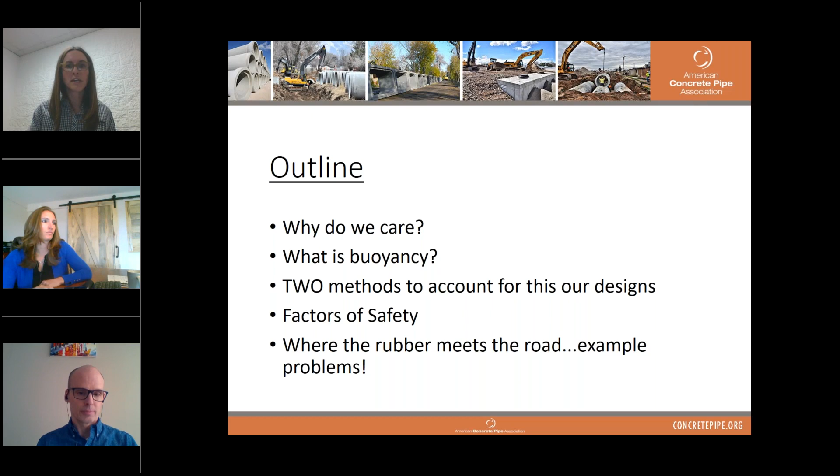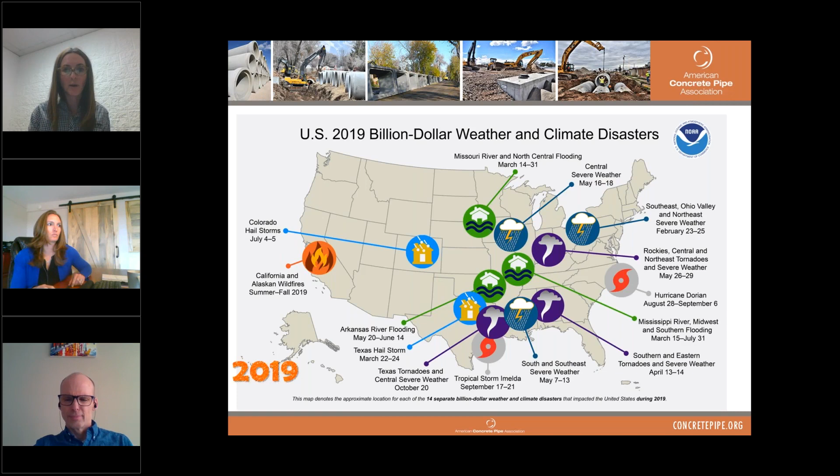This is a figure from NOAA showing 2019 billion-dollar weather and climate disasters. Pipe flotation is becoming a more common occurrence these days. If you look at the extreme events we've seen in recent years, many of them involve flooding and extreme water levels that are beyond what we typically design for.

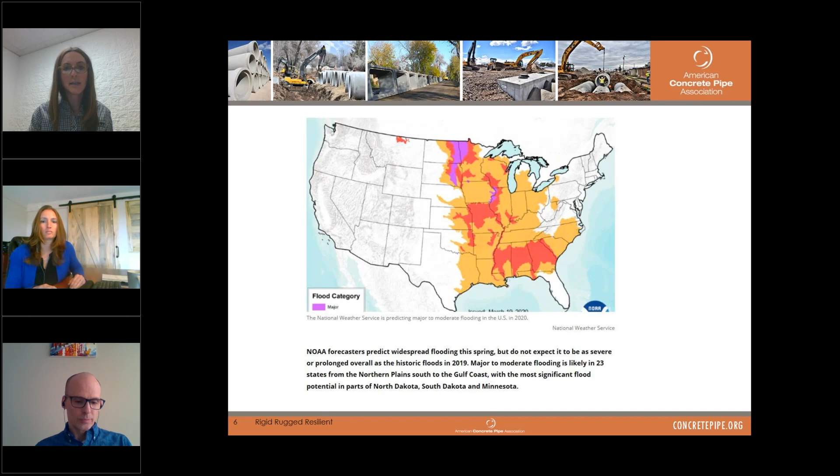This is another graphic from NOAA, and they're predicting widespread flooding this spring. Not as severe or prolonged as 2019, but major to moderate flooding in 23 states from the Northern Plains to the Gulf Coast, with most significant flood potential in parts of North Dakota, South Dakota, and Minnesota. So pipe flotation is something we should be looking at as we go through our pipeline designs and culvert designs.

So let's talk a little bit about buoyancy, get some of those concepts down. So what is buoyancy? There's an upward or buoyant force on any object in any fluid. If the buoyant force is greater than the object's weight, it will rise to the surface. If the buoyant force equals the object's weight, it will remain suspended. If the object's weight is greater than the buoyant force, it'll sink, right?

The buoyant force is always present. It's kind of like the tagline from a Star Wars movie, right? The force is always with you. So whether the object floats, sinks, or is suspended in a fluid, buoyancy force is there.

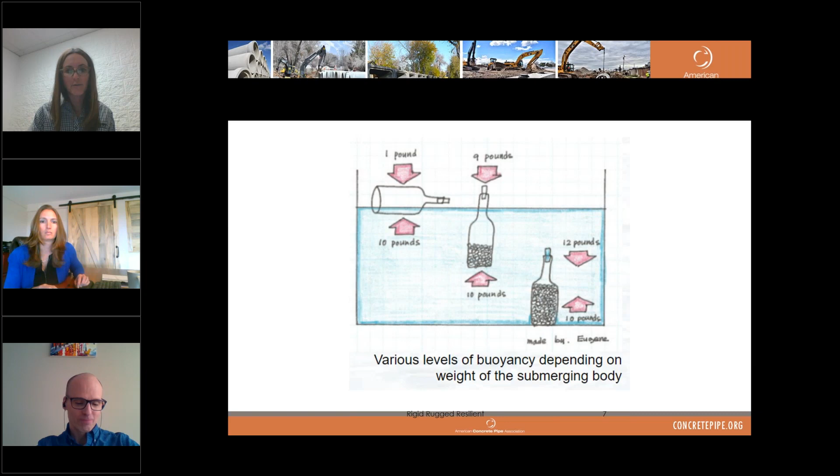So let's watch a quick video about how we calculate the buoyant force and Archimedes' principle.

Kim, can you play that for us? Absolutely. Let me get that pulled up real quick. Thank you. And you guys should all be able to hear this through your computers. So if your computer speakers are not turned up, you might want to turn those on while we play this.

Ships in the world weigh many hundreds of thousands of tons, yet they still float. It does seem counterintuitive to a lot of people. So just what is it that stops these enormous ships from sinking? For the answer, we actually look to ancient Greece. Archimedes was a brilliant mathematician. He wrote many works documenting his discoveries. For us, we're interested in the work called On Floating Bodies, which he wrote as 2 volumes around 250 BC. Within these volumes is a principle that has become known as the Archimedes principle.

Any body wholly or partially immersed in a fluid experiences an upward force equal to the weight of the fluid displaced. Now this applies to everything in a fluid. Take this brick as an example. If we lower it into the water, it's going to sink. But Archimedes' principle still applies. The brick is still experiencing an upward force equal to the fluid that is displaced. It's just the upward force is not enough to counter the weight of the brick. You can measure the amount of fluid displaced by either calculating the volume of the brick mathematically or measuring the amount of water that has been pushed aside.

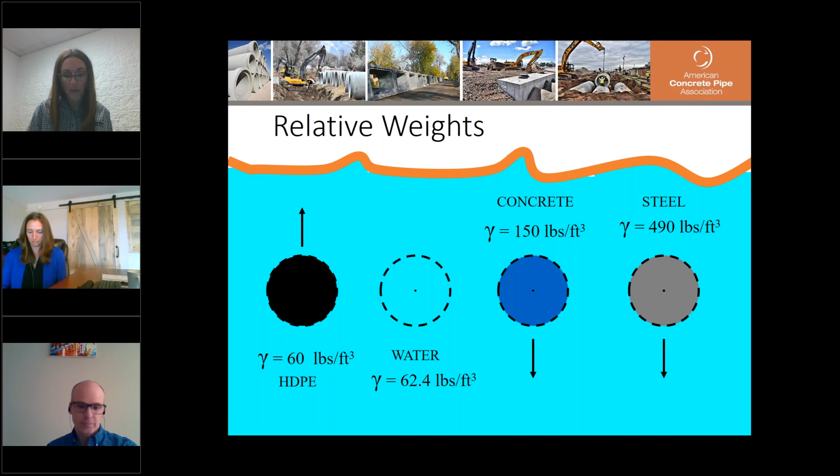We've all heard of the ASCE concrete canoe competition, right? Similar scenario, if we took a brick of concrete and we put it in water, it would sink. If we hollow it out in the shape of a canoe, it will float. Remember, objects just need to have a greater ratio of empty space to mass than the fluid.

So let's talk about some pipe weights. So if you have an empty pipe, it's not just the density of the pipe wall material that matters. We also have to consider the weight of the water that it will displace. That's the buoyant force, right? So if we take a 48-inch diameter concrete pipe with a wall thickness of 5 inches, it would displace a volume of about 18 cubic feet per foot.

Multiplying that by the unit weight of water results in a weight of 1,145 pounds per foot. For the sake of a simple comparison, we're going to assume that the pipe materials shown displace that same volume, although admittedly HDPE and steel would take less volume.

So let's take a 48-inch diameter HDPE pipe. It would weigh roughly 26 pounds per foot, compared to the weight of water, 1,145 pounds per foot. Again, this is the amount that it displaces, that buoyant force. And if we assume that pipe is sealed, empty, no soil above it, then it would definitely float, right?

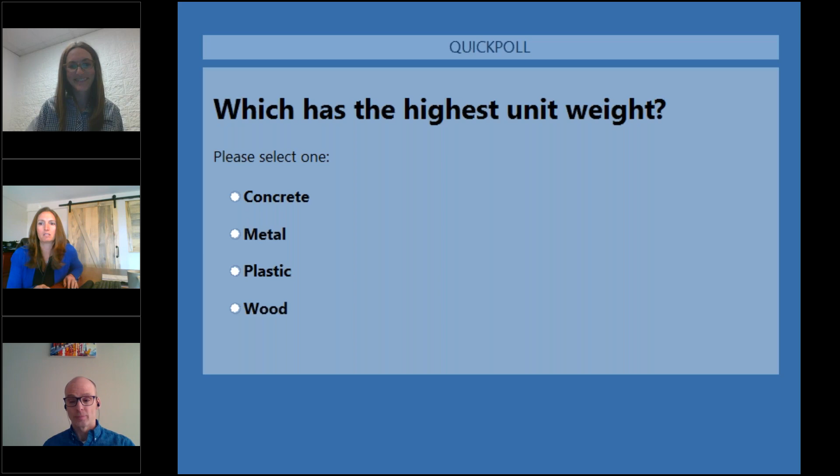Share the results. And we got 58% that said metal, 42% said concrete. Ooh, trick question there, huh? Yeah. All right.

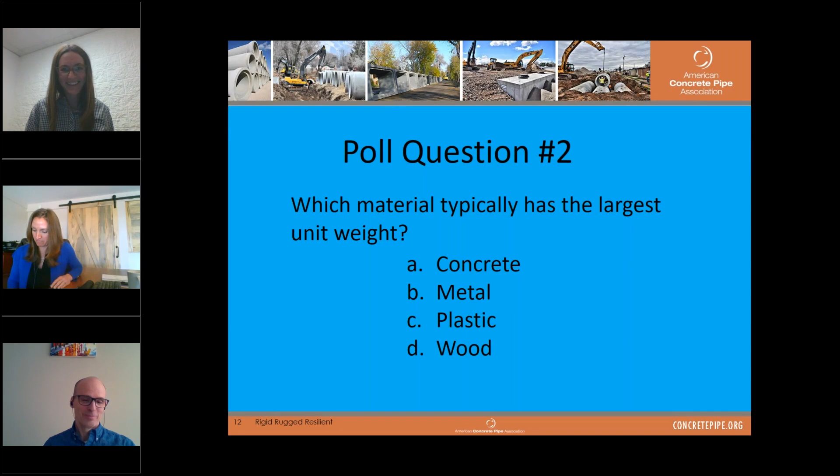So now that we talked about the different pipe weights, let's think about this flotation calculation. Of course, we're talking about buried pipe today, so we have the benefit of a soil load on top of the pipe to help hold that down. We only need to worry about pipe flotation when the pipe is buried under shallow covers. However, as engineers, it's up to us to determine how shallow pipe can be buried before flotation becomes a concern.

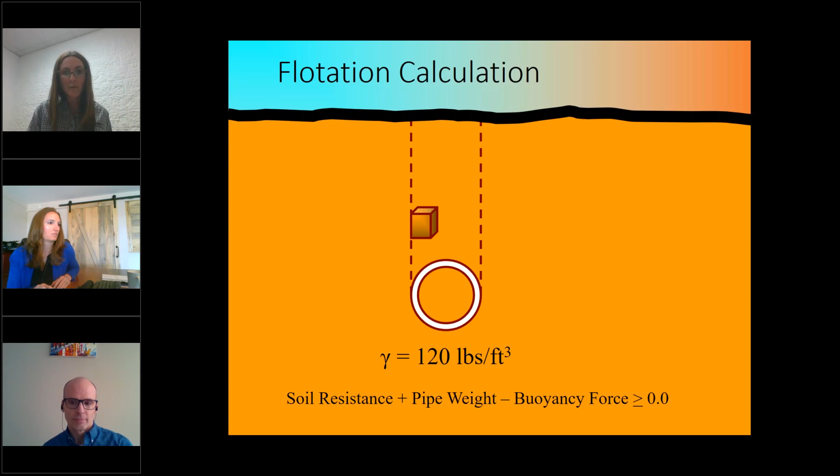And as we do this calculation, we're going to look at balancing the buoyant force, which is attempting to push that pipe up, with the vertical soil load pushing the pipe down. And we're going to include a factor of safety in there, which we'll talk about in a little bit. So let's think about this microstructure of soil that we're relying on to push that pipe down.

If we sweep the cobwebs out of our brain from soils class, we'll remember that we have a phase diagram to describe the structure of soil, and it's composed of solids, water, and air. If a pipe is buried in soil where the only void space is filled with air, there's no concern for potential of flotation, right? Because that buoyant force only exists when an object is in a fluid. However, if the voids are filled with water, then the pipe has an upward buoyant force.

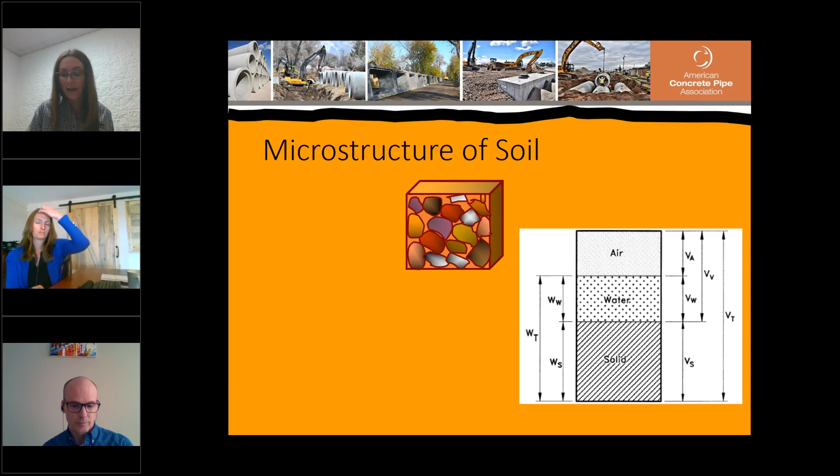Additionally, though, the soil itself imposes less of a downward force because of the buoyancy effect on it. So we have to account for that in this calculation. And we're going to do that by using a buoyant weight of soil, which is going to be equal to the saturated unit weight of soil minus the unit weight of water.

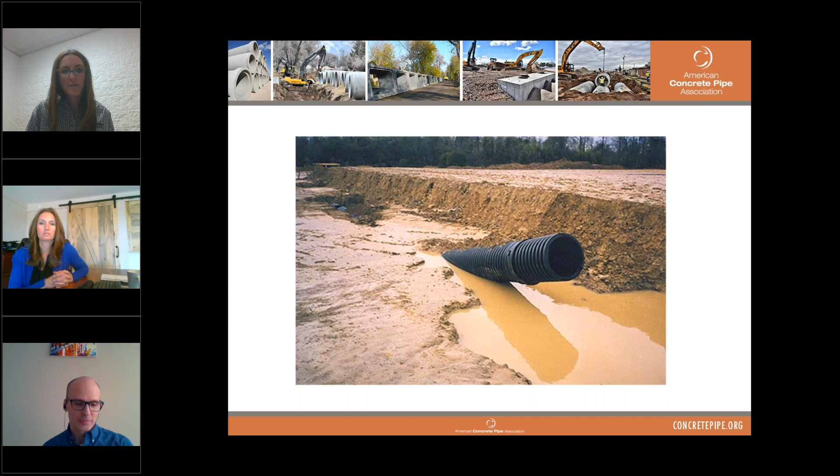What a mess, right? So we can see in this photo that it looks like all of our void spaces are filled with water. So how do we calculate this before it happens? Let's walk through a couple different methods. In both of these methods, the difference between the two is how we calculate that soil resistance for buoyancy. You'll see when Josh goes through the examples that we're following the same procedure. The only difference between the two is how we're going to calculate the soil resistance.

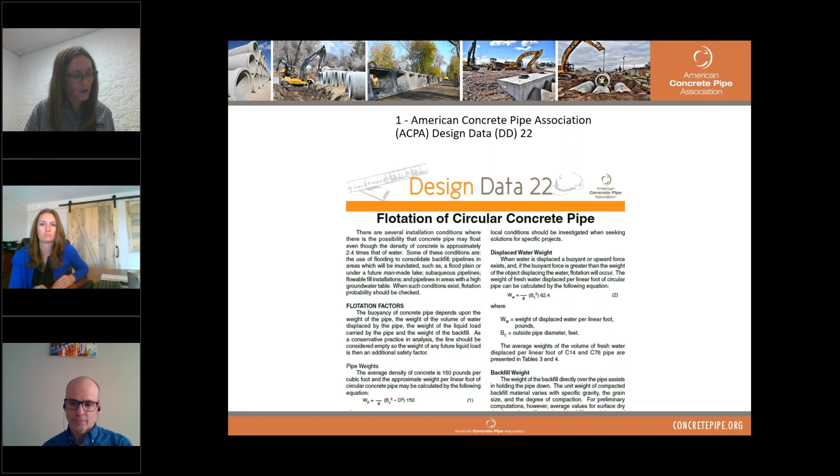So that first method is defined by the ACPA Design Data 22. And this is a handout that's available if you go to the toolbar. Kim provided it there for you. And this is often referred to as the column method.

The second method that we're going to talk about is the Watkins-Moser method from Utah State. And this method is a little less conservative, and I'll offer you a little bit of history about Watkins. You'll see in the screen there's a photo of him teaching pipeline students at UT Arlington.

So Watkins graduated from MIT with a master's degree, and he really wanted to study structures and bridges, actually. But the nation was still recovering from World War II at that time, and bridges were of low priority. So he ended up joining the faculty at the Utah State Agricultural College, and his emphasis was on water distribution in the arid Great Basin. So besides his teaching assignments, they had asked him to assess irrigation canals.

And interestingly, he found that the canals lost a third of their flow per mile due to evaporation, infiltration, plant growth, and rodent activity. And he was also depressed by the fact that there were a lot of children that died in these canals as they were trying to play in them. So he thought, if we could use buried pipes to replace these channels, it would probably be safer.

So he took a sabbatical, and he went to Iowa State, and he studied buried pipes under Spangler. And he graduated with a PhD there in 1957. So as we talk about his methodology, he has more of an ag background, and I think that's why his method is a little less conservative.

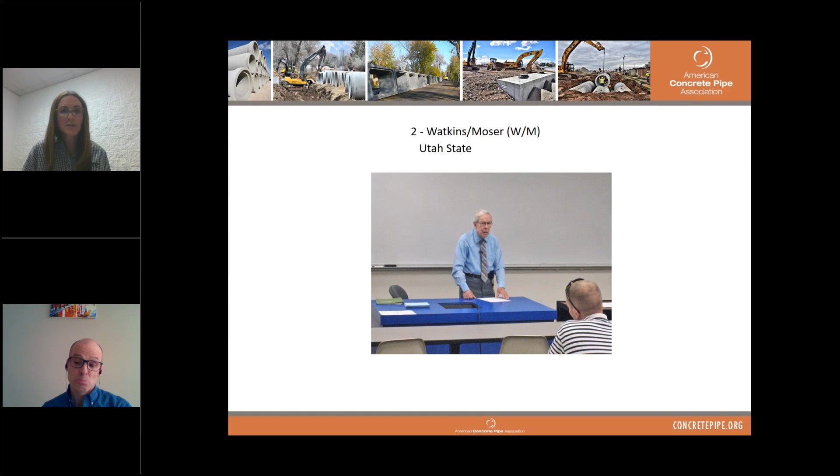So let's look at those equations and the information that we're going to need to have as we start to look at calculations. So we're going to need to know the depth of cover on that pipe. We need to know the outside diameter of it. We're going to need to know where that water elevation is, whether it's the groundwater that we're accounting for or some other arbitrary groundwater elevation. Maybe we're planning on jetting those trenches. And then we're also going to need to know the saturated unit weight of the soil we're dealing with.

So the first method, remember, this is also called the column method. We are going to calculate the soil in a column directly above that pipe, and that's depicted in the dashed lines that you see extending to the surface there from either side of the outside diameter of the pipe. Sometimes this is referred to as the prism load, and it's equal to the depth of cover times the outside diameter.

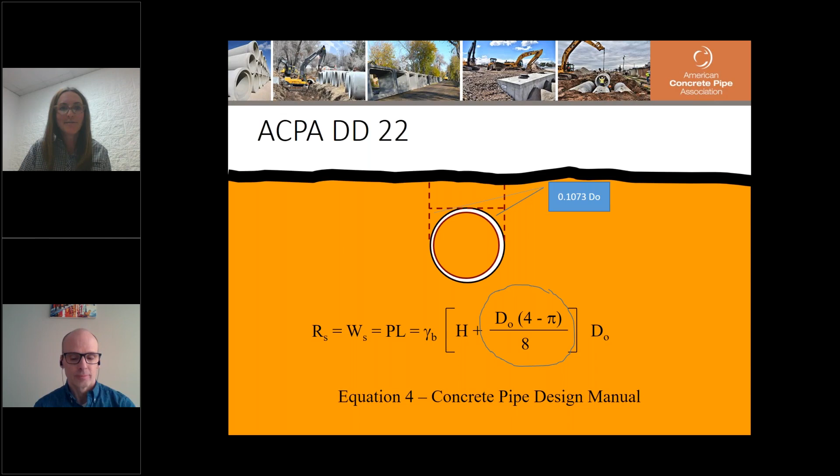And then we're also going to include the haunch material above that pipe. We're going to take the area of a square, right? I was going to say rectangle. The area of a square, DO times DO, and we're going to subtract the area of that circle defined by a diameter of DO, and we're going to divide that by 2. Sometimes in literature, you'll see that area defined as 0.1073 times DO. So that's that method.

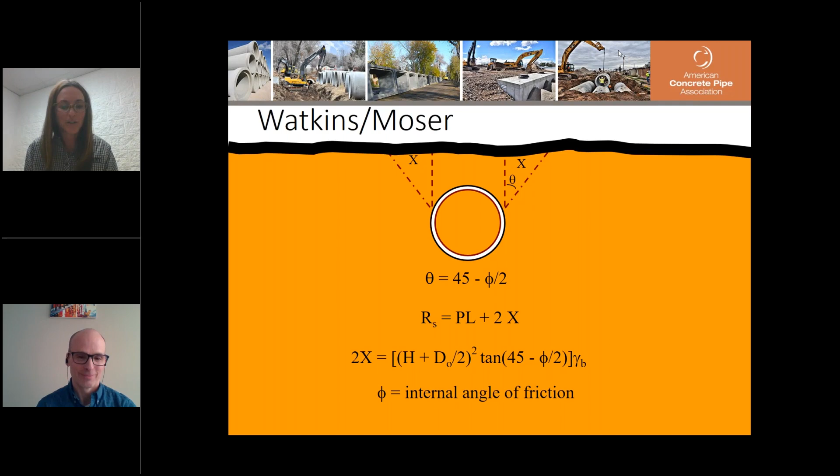And we're not going to dive into the geometry of how to solve that today, but I included a little bit better picture for you. Let's see if I can get it to come up here. So this is a diagram that I took out of Buried Pipe Design 3rd edition, and you can see that soil wedge is really well defined here, again defined by that internal angle of friction of the soil.

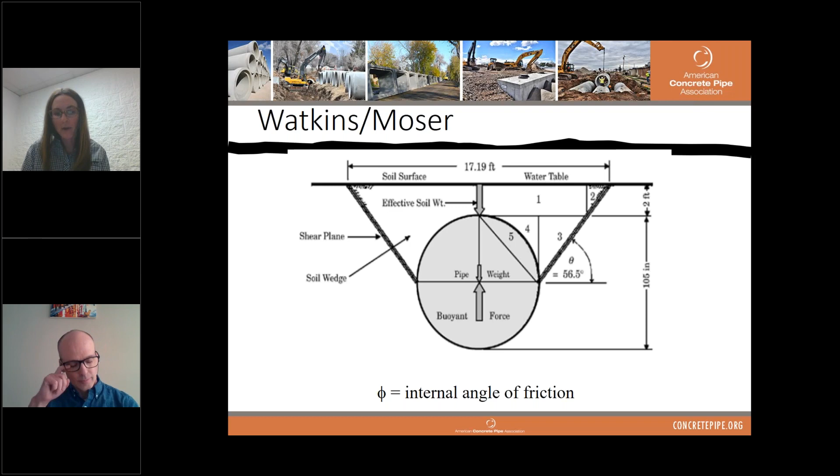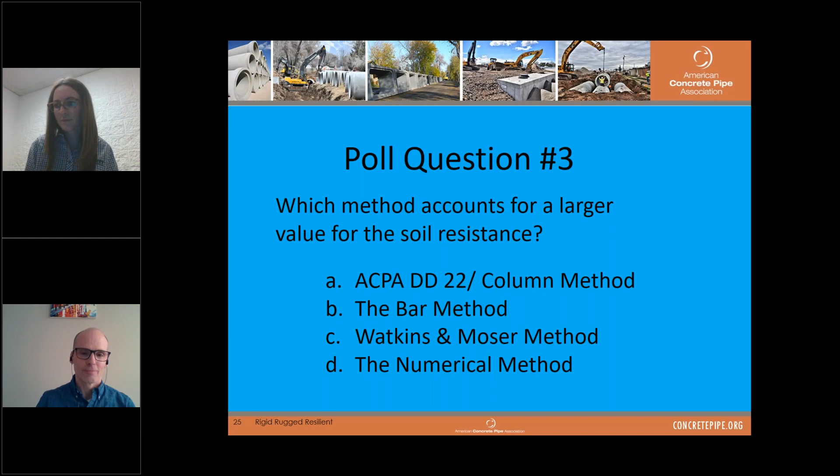Poll question number 3, Kim. Which method accounts for a larger value for the soil resistance? Okay, all things being equal, pipe size and installation conditions, which pipe material is least likely to float?

While you guys are answering, I saw a really cool comment in the question pane that someone had Dr. Watkins at USU in '92 and still has his notes. Oh, that's kind of cool. Really? That's very cool.

Okay. Looks like the poll is stalled, so I'm going to close that and share the results with you guys. Jennifer and Josh, we have 68% said concrete is least likely to float, 25% said metal, and then the bottom two were plastic and wood, split 5 and 3%.

Okay, now who really said wood in this thing? Come on now. Maybe they thought that it said most likely to float. Maybe.

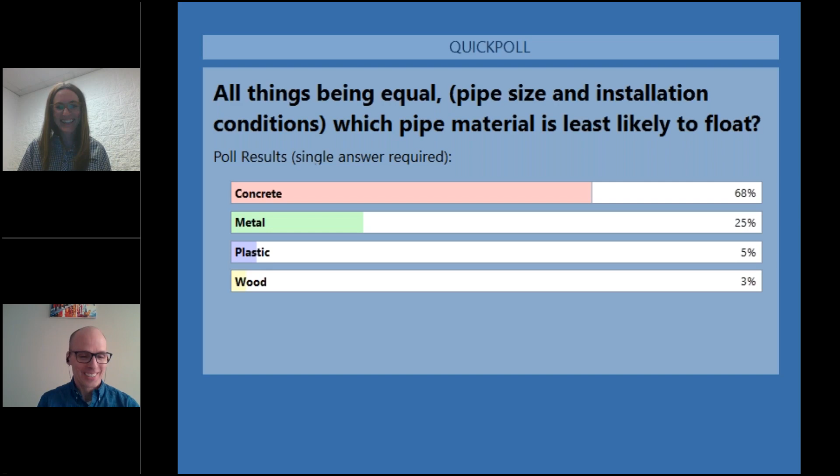All right, well, let's talk a little bit about factors of safety before we get into some example problems here. In some instances, we're going to find that the downward force of the soil is going to offset those buoyant forces. And we know soils can vary significantly over a job site. So how much variability is there? In other instances, the weight of the structure will be enough to offset the buoyant force. The structure weight should be less variable, right? So that seems like it would be maybe less of a factor of safety there.

So as we analyze our designs for flotation potential, what type of factor of safety are we going to look to? So let's look to our structural engineers and our geotech friends to see what guidance they're using that we might be able to borrow on structures. So I included a few of those factors of safety for you to look at. So slope stability, we're looking anywhere from 1.3 to 1.5. When we get into those foundation analyses, we're looking anywhere from 2 to 3. That's a pretty significant factor of safety, in my opinion.

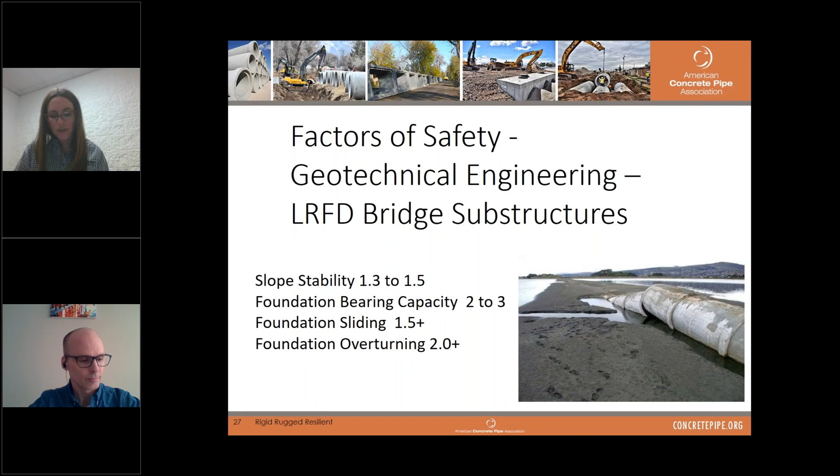And when I think back in my consulting career, when we used to design bridges and structures, we tended to do a much more robust soils investigation and spend more money there than we did, for example, on subdivisions. So as we talk about these factors of safety, keep in mind how much reliable information we have to base our decisions and our designs on. So Josh, do you want to offer to us what you see in terms of factors of safety that are associated with flotation?

Sure, and you and I have talked about it, you kind of alluded to it in that previous slide, and that factor of safety, and you may want to even call it load factor, depending on how you apply it to the equation, which you and I'll bring up later, really comes down to how well you know the variable you're using in your equation. So we have two different methods we're talking about today, and obviously I think the one that has less reliability on the soil should probably have a lower factor of safety than the one that has the higher reliability on the soil.

Do you want me to put out a number, or do you want me to just show it later? Lay it out there for me, Josh. Give me a number. I'll lay it out there for you. In general, we've suggested a 1.25 factor of safety for when you're using what we call the column load, basically looking at a soil prism. It's really not much different than if you were designing your pipe and you had the 1.3 vertical load factor for the earth load going down on it. It's a very similar load factor in that sense.

When you use what we're calling the Watkins-Moser method, that soil wedge actually adds almost double the amount of soil resistance you're calculating. So you should up the factor of safety, especially since it relies on soil friction, which is another tougher unknown. So we figure you should have a factor of safety around 2 or something like that. Okay, great. And we'll see that in your example problems later too, if you didn't get a chance to jot that down.

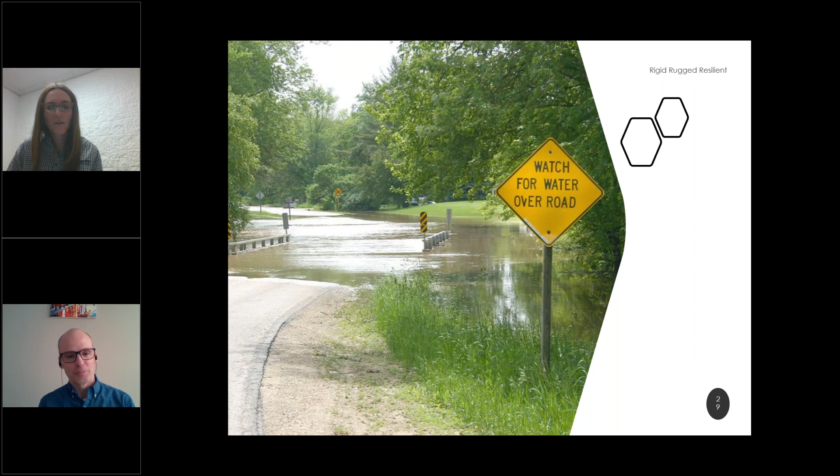Thank you. So Josh, run us through some examples now, and you'll see as you go through those that we're going to kind of follow the same methodology where we're calculating that buoyant force to see if flotation is a concern. We're calculating that soil resistance, and then we're including that factor of safety in there. So go ahead, Josh, please. All right, thank you.

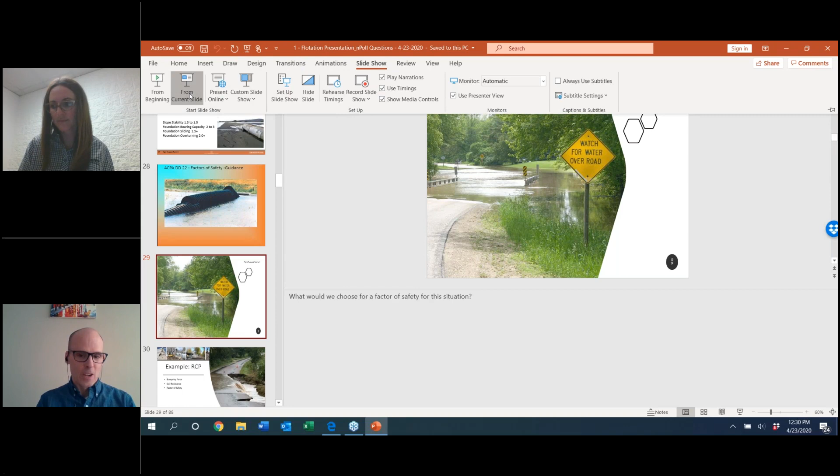Can we all see the example RCP shown on my screen now? I think we're maybe a second delayed. Yep, now we see it. All right, awesome, thank you.

Yeah, so we're going to go through some examples showing some of the philosophy that Jennifer was teaching us. So we're going to do 3 examples, starting out with RCP. We're going to touch upon metal and plastic as well. Sorry to disappoint some of you, but we won't be doing any wood pipe today. But we will be doing 3 different pipe materials, just to give a comparison and give us a better experience in terms of getting some good practice in.

So we'll check out our buoyancy force on those pipes, the soil resistance provided to help keep those pipes from floating up, and applying the factor of safety in what we're calculating. So these are all going to be 48-inch pipes. Once again, concrete, metal, and plastic. We're going to put them 1 foot below the surface, which is admittedly relatively shallow.

And in fact, in some cases, AASHTO wouldn't even allow you to put it 1 foot under the surface if it's plastic pipe under pavement or something. But in general, sometimes people get desperate and have to put pipe that shallow. So it's going to be 1 foot under the ground, and we're going to see the water table at the surface.

So I'll start out with a 48-inch pipe, outside diameter of 58 inches. We're going to put it in feet so it's easy to calculate. We evaluate our fluid weight in pounds per cubic foot. So that's the parameter given. Now we're going to first figure out what our pipe weight is. In this case, it's going to be 867 pounds per foot.

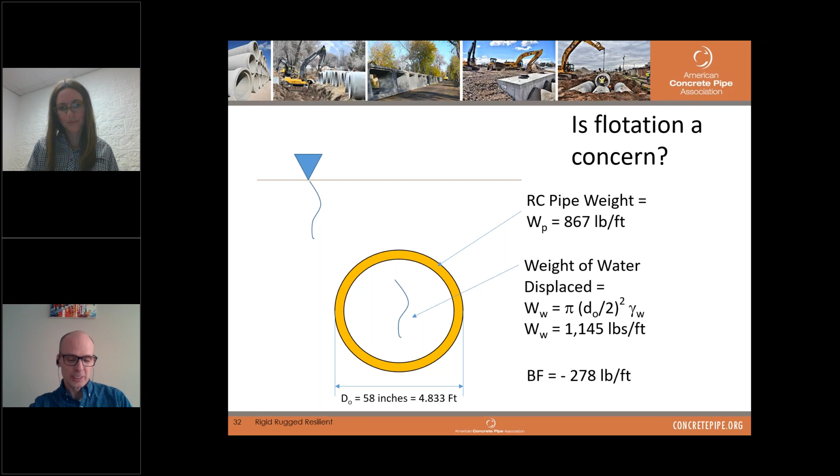So we have a buoyancy force of 278 pounds per foot pushing upward. Now let's see what kind of resistance we can get from our soil to help us keep that pipe from floating. We start out with the column method. We have it here in our PowerPoint, and if you ever need to look it up, once again, that's another one that's in our concrete pipe design manual as far as the equation.

We're taking that 120 pounds per cubic foot saturated weight, subtracting the unit weight of water, and multiply by the 1 foot of fill, include these upper haunches in our calculations, and we come out with a soil resistance of 423 pounds per foot. So that's how much additional resistance to flotation we're going to get from the downward force of the soil. That was using the column method.

Now, if we use the Watkins-Moser method, we're going to actually have that soil prism along with those soil wedges. So the soil prism itself we have, and we calculate for those soil wedges by incorporating that angle of internal friction to figure out this slope here. And we come up with an area for the wedges, gives us a number of 388 pounds per linear foot. So as I mentioned earlier, you get almost twice as much soil resistance using the Watkins-Moser method as you would using the soil column method.

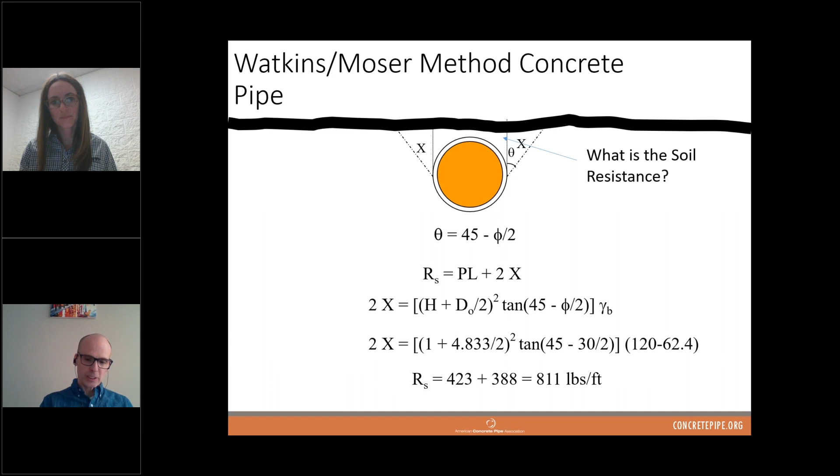And not to mention, the Watkins-Moser method takes a little more time to calculate in the end, right? Because you have to calculate the wedges. So we bring up both these methods because obviously the Watkins-Moser method is out there in textbooks and things, as well as the column method. So we want people to see both of them, but as a recommendation, we would recommend simply using the prism method, which if you look around these days, most pipe industries are promoting as well. So we're not the only ones out there promoting that, but we are showing you both methods.

Now, when you get to that point, we have to apply these factors of safety. I call it factor of safety, maybe I should call it a load factor. Jennifer and I have discussed this a few times. We're taking this buoyancy force, and I multiply it by a factor of safety. In reality, I'm kind of applying a load factor here to be conservative in our analysis because of the unknowns, the soil properties. We take that buoyancy force, add it to the resistance, and see what the net result is. If it's positive, that means the pipe should not float. If it's negative, you can expect the pipe to float.

Now, Jennifer, I know you think perhaps we should look at factor of safety on the other side of the equation. Any thoughts to share on that? Yeah, when we were putting this together, I would think that you'd want to apply that factor of safety to the resistance of the soil, because that would seem to me to be much more variable than that buoyant force.

Yeah, and that makes a lot of sense. You got me thinking about it quite a bit myself. I mentioned to you that I think it's maybe an old versus new philosophy here, and most structural engineers these days are used to designing for the LRFD, load resistance factor design, method, where we're applying load factors to the load, and the load in this case is really the buoyancy force. So a better way of saying it is applying load factors to the buoyancy force and analyzing versus the resistance, which comes from the soil. But either way you slice it, you're coming up with an appropriate answer.

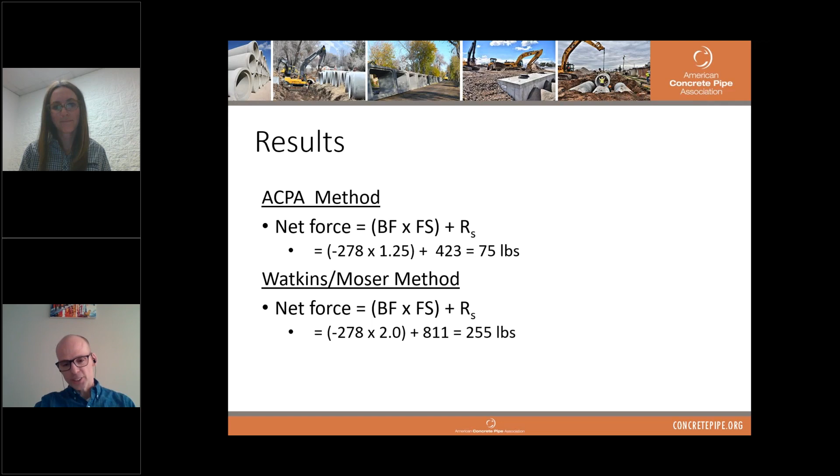So if we compare the two methods, Watkins-Moser looks a little more conservative, and it's really only more conservative because we applied a higher factor of safety to it. ACPA method gives you 75 pounds net force, Watkins-Moser gives you 255. In either case, we're showing the pipe does not float. We have the same buoyancy force for each. Watkins-Moser has a little bit higher soil resistance force.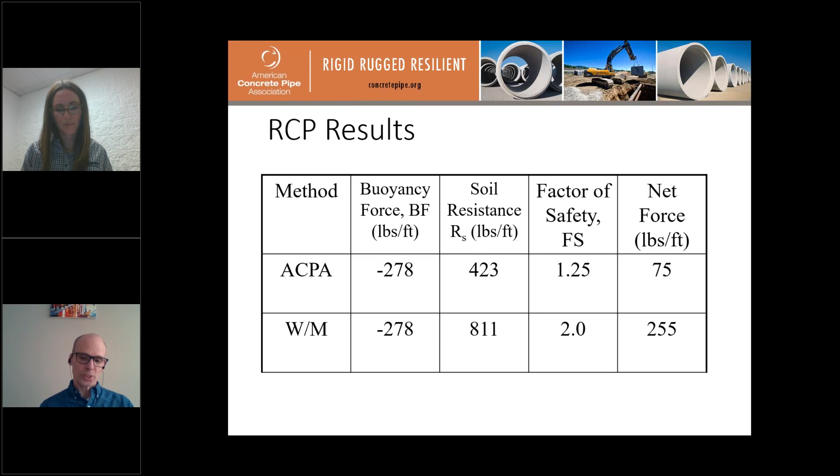Ooh, okay. We have another poll question. And this is sort of a trick question too, I'll warn you. It just kind of depends on your preference, I think. Did you make all these trick questions, Josh? No, that last one was kind of a trick. You can do this poll question. While you're doing that, I'll mention that one where it was like 50-50 between concrete and metal.

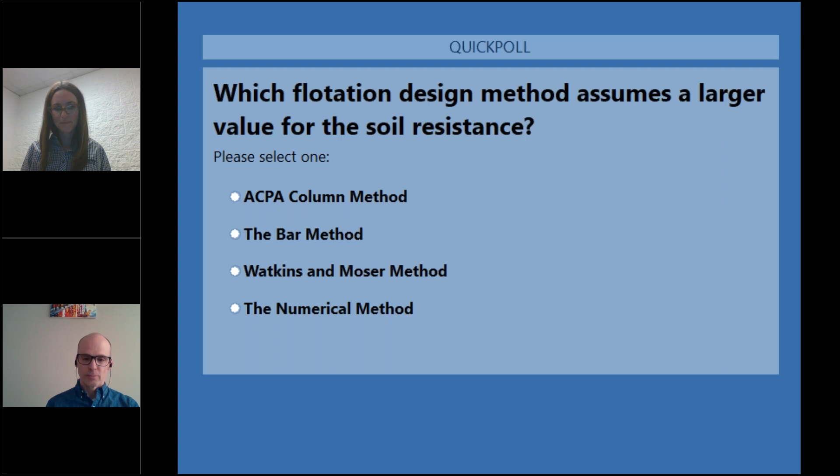Great point, Josh. All right, I'm going to close this poll and share the results with the audience. And since you guys can't see the speakers, you got 83% Watkins and Moser method, 12% ACPA column method. All right.

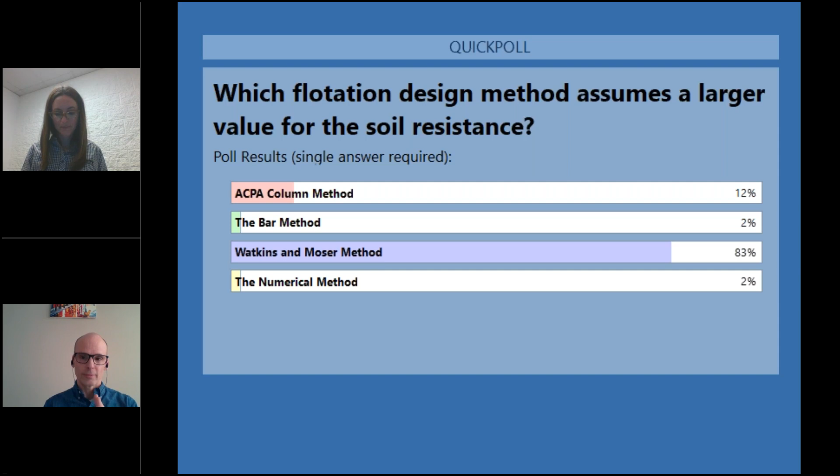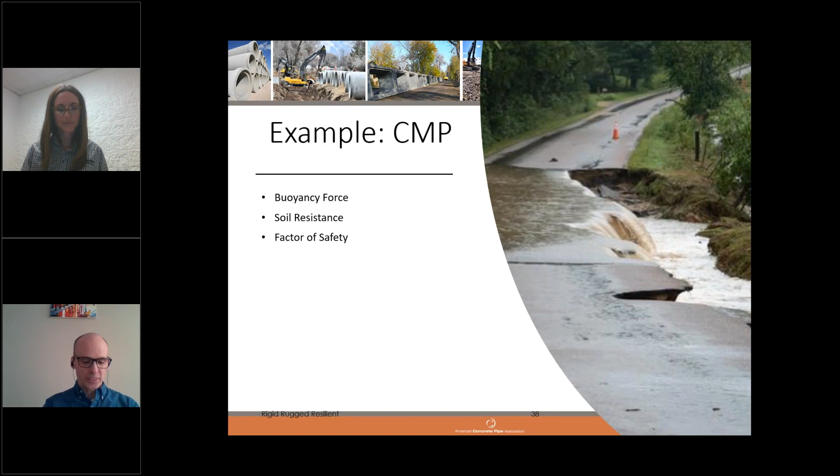Okay, so our next example is going to be CMP, corrugated metal pipe. We're going to take the same conditions now and run them through the metal pipe to see how that works out. As I mentioned, metal, in this case steel, is a lot heavier than concrete, but in terms of pipe itself, it's a much lighter pipe weight. They have a pipe weight of 48 pounds per linear foot for a 48-inch pipe.

Now, metal pipe values, you can find them in the National Corrugated Steel Pipe Association Corrugated Steel Pipe Design Manual, so you can find them online as well if you're looking for the metal pipe weights. We picked the 48 pounds per foot. Metal pipe weight can vary a little bit depending on the coatings you're using. Kind of a basic weight for it. You start adding coatings, it will get a little bit heavier, but not drastically so.

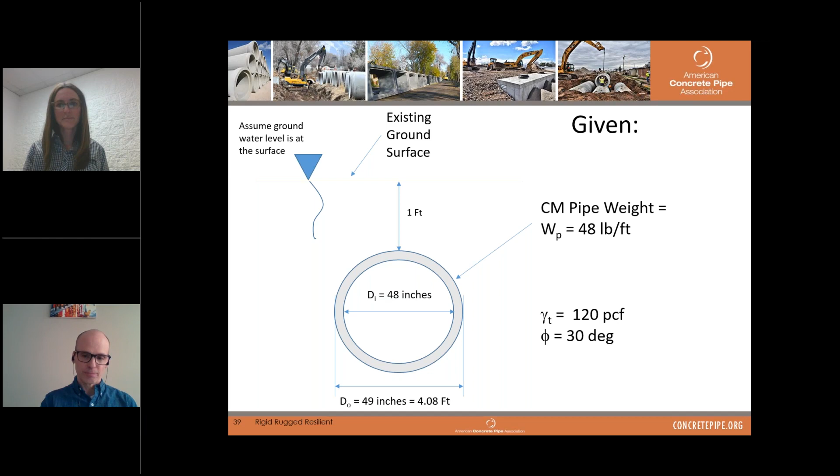We assumed a 2 2/3 by 1/2 inch corrugation, so I used an outer diameter of 49 inches for this one. So it is displacing a little bit less area, so the buoyancy force will be a little bit less. Same conditions in terms of our saturated soil weight and the soil property and internal angle of friction. So as I mentioned, this one displaces less water. If anyone can recall, I believe we were around 1,100 pounds per foot of water that would be displaced by a concrete pipe. In this case, it's 817 pounds per foot displaced by this metal pipe.

Net buoyancy force, however, is much higher because the pipe is so light. So our buoyancy force in this case is negative 769 pounds per foot. So that's a pretty hefty buoyancy force when we push up on that pipe and make it push up to the ground. So let's see if the ground can handle all that buoyancy force. Let's go take a look at some numbers.

ACPA method, we have the soil prism here. ACPA method, column method, whatever you want to call it. We run through those numbers once again, subtracting water out of the saturated soil weight. So this might actually be heavier in some cases than what you're used to using, but multiply with 1 foot of fill and incorporate the upper haunches. We have a soil resistance of 338 pounds per foot.

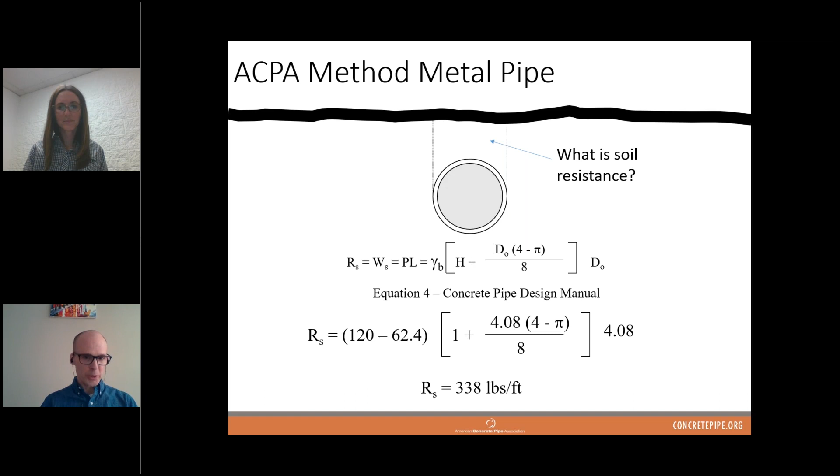Now, if I recall correctly, that previous slide, our buoyancy force was higher than that. So it's starting to look like this pipe's probably going to be a floater. We have a floater, folks. Okay, and the next one, Watkins and Moser method. If we check this one and incorporate the soil wedges, we'll look at it, and once again, we have the soil prism load, and now we're going to add that soil wedge.

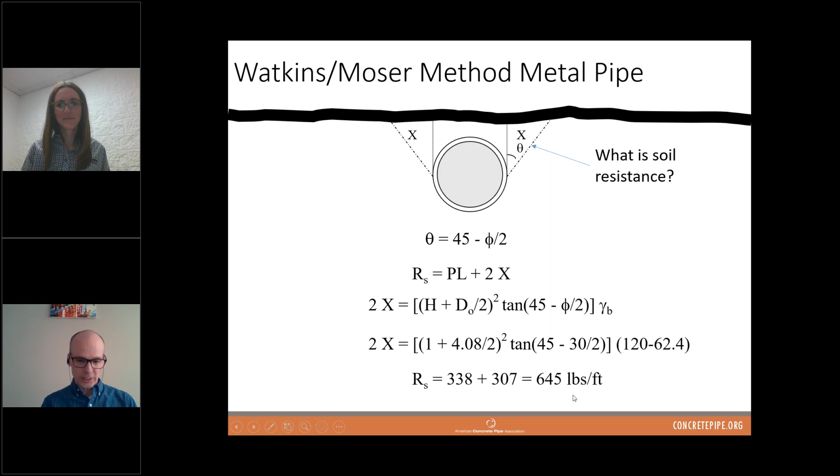And as mentioned before, it makes roughly twice as much. So if we take a look at that, it gives us a total force of 645 pounds per foot, counting for these soil wedges. We toss it all in together, and whether you apply a factor of safety or not, you're still going to find that that pipe has a net negative force, which means it's going to go upward, which means your pipe is going to float out of the ground if you don't have 1 foot of cover over it. In this case, this 48-inch metal pipe will float through the ground.

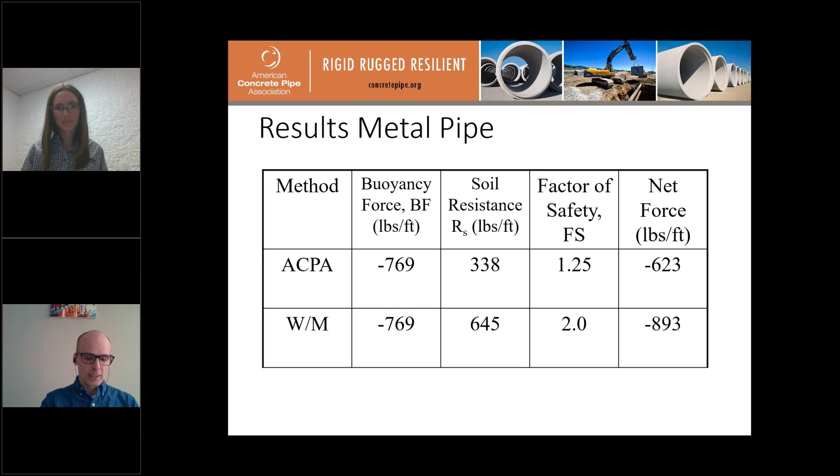So that would be something you want to be concerned about, and we'll talk a little bit later about maybe ways of tying it down or other pipe options, really, one or the other. One more shot here. We're going to do plastic. Now, if metal pipe floated, what do you think the plastic pipe's going to do? Well, we're going to run the numbers anyway, just to give us some experience here.

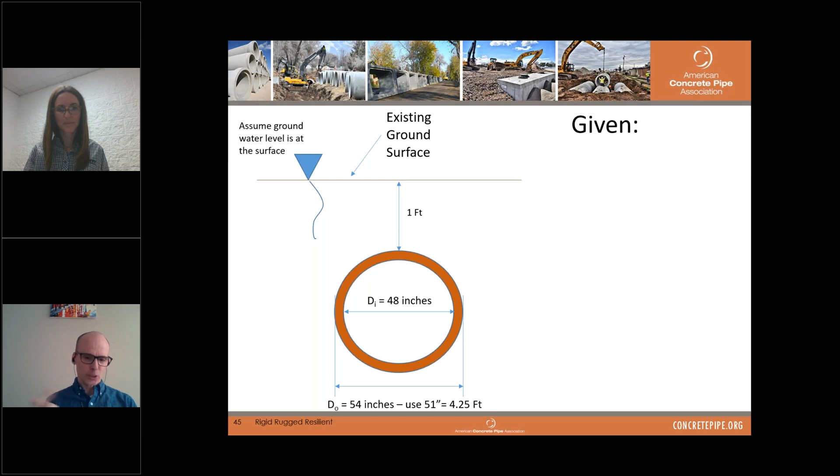Same philosophy. In this case, it's 48-inch pipe. It's got a corrugated outer diameter. Outside diameter is 54 inches. I split the difference and used the median outside diameter since it is corrugated, and used 4.25 feet for the outside diameter. Now that weight you can't really find in too many places, so that's a little more difficult. When you look for that weight, in my case, I calculated it based on the wall area of the pipe itself.

If you look in the corrugated plastic pipe drainage handbook that PPI produces, which is pretty good material, they do not have pipe weights in there. Although the interesting thing about it is they are one of the few manuals that actually does have an example of buoyancy force. And in their manual, they pretty much tell you plastic pipe weight is so small, at the end of the day, if you ignore it, it doesn't matter that much anyway.

So if you don't feel like looking up the pipe weight for your plastic pipe, it's only 20-some pounds anyway, just ignore it. It's just a small portion of the resistance because the soil is giving you most of the resistance. So you can cut your calculation a little short if you want. But we're going to go through it anyway and use the pipe weight as we do with the other materials. Pipe weight of 26 pounds per foot displaces 885 pounds per foot of water. Net buoyancy force of negative 859 pounds per foot.

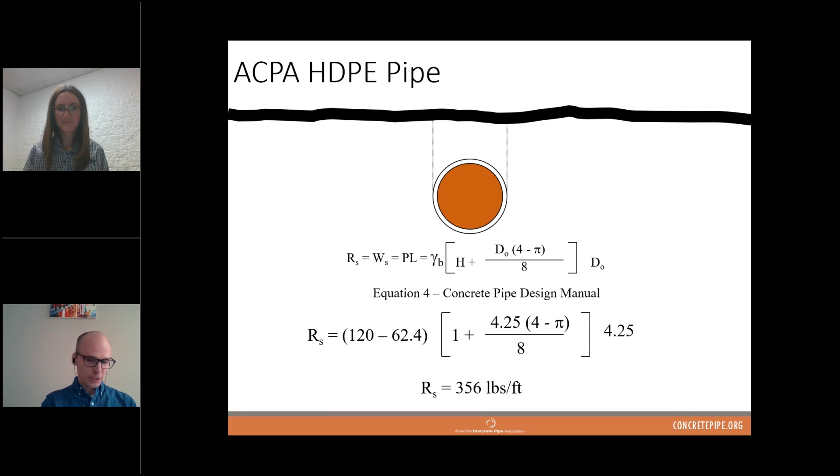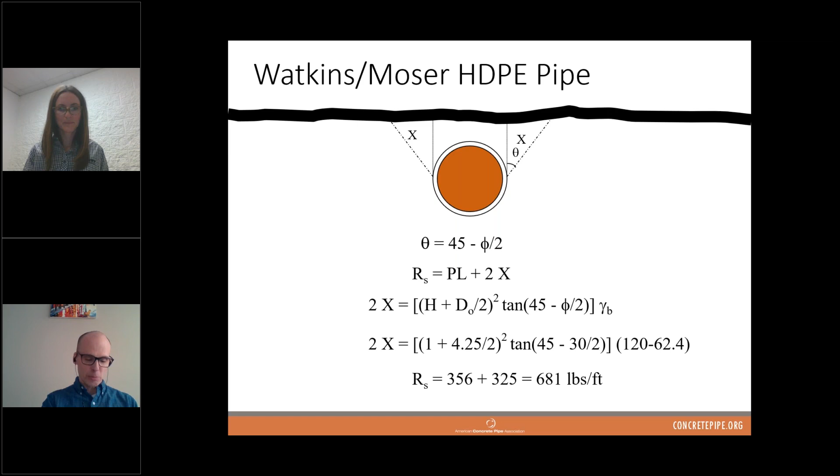We run through these methods, and we come through here. Soil prism load is 356 pounds per foot, similar to what the other ones gave us. For the prism load, Watkins/Moser is 681 pounds per foot. Once again, neither one of these are nearly as much as that buoyancy force we just saw. So at the end of the day, we would expect these pipes are going to float, whether you're analyzing with the ACPA method or the Watkins/Moser method. So you see in all three examples that we got the same end result. Concrete pipe didn't float. The plastic and metal pipe did, regardless of which method you analyze.

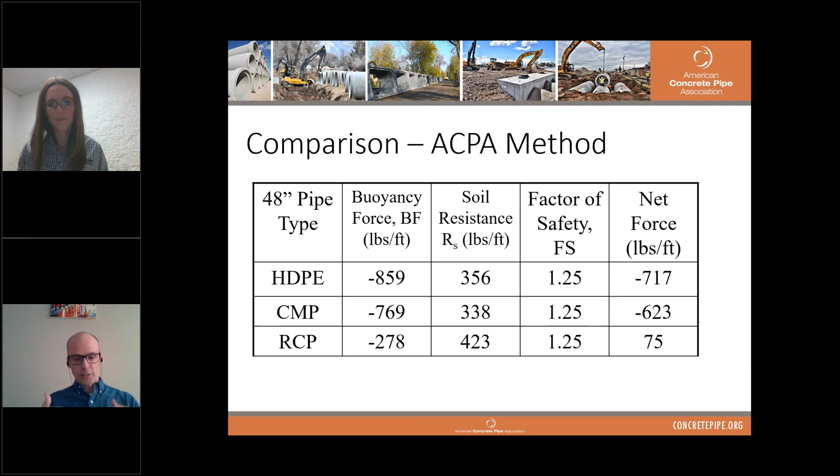So you run the numbers for the cover, you're looking at something like this, which is something you don't want. I mentioned AASHTO in a lot of cases doesn't even allow 1 foot of cover. But it is interesting, the AASHTO LRFD bridge design specs do tell you that you need to evaluate for flotation. They don't tell you how to do it, but they do tell you in section 12.6.1 that buoyancy and flotation need to be considered anytime the water elevation is above the invert of the pipe. So this is good information to have. You have to worry about that. This is the Watkins/Moser method, same net result.

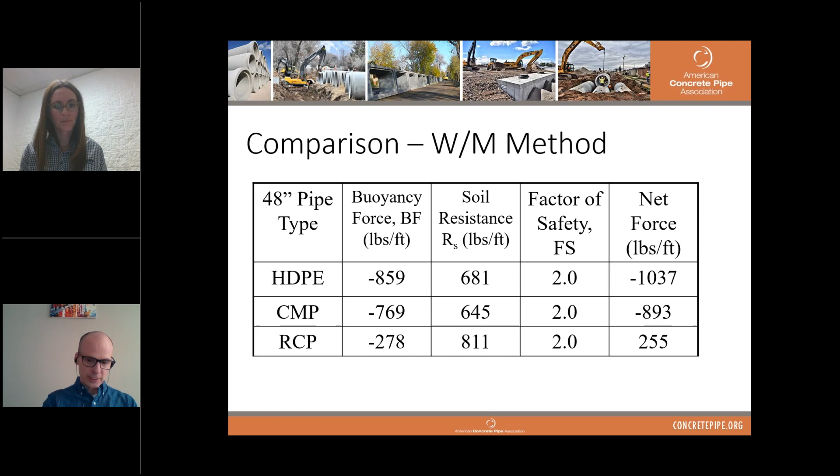So how much would you need to keep those pipes from floating up? We saw concrete pipe, if you look at the ACPA method in the upper row here, with the 48-inch pipe and 1 foot of fill, it would not float. You can get down to about 0.8 feet of fill before that 48-inch pipe would float. The CMP and HDPE were floating at 1 foot, but if you had roughly 3.7 feet over the CMP or 4 feet over the HDPE, you could keep them from floating.

Interesting thing, Jennifer pointed this out to me as we were going through this and preparing this, was a good rule of thumb for plastic pipe is to roughly have the same amount of fill height above the pipe as the diameter of the pipe itself. So in our case, we had a 48-inch diameter pipe, 4 feet diameter. You need about 4 feet above it to keep it from floating. If it had been a 36-inch pipe, you would need roughly about 3 feet of fill to keep it from floating. You might want to run the numbers, but nonetheless, back of the envelope kind of thing, good rule of thumb, just to think of it in those terms.

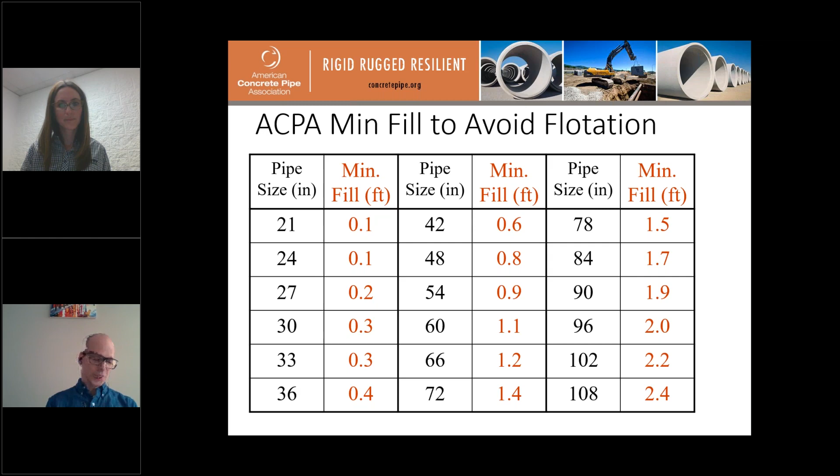We don't have the same kind of rule of thumb for concrete pipe, but we do provide you with a table in this presentation so that those of you who get the slides later can see roughly how much fill you need over the concrete pipe to keep it from floating.

And one other thing, and we're going to talk about some other things. I know Jennifer's going to pick up on some other key aspects of flotation here, but definitely we see a lot of people when they get shallow fill trying to make up for that cover by using an elliptical concrete pipe. Well, the really cool thing about elliptical pipe is it gives you the same flow area, but it's got a wider span, which means it has more soil above it. So it tends to have a higher soil resistance. So elliptical pipe comes out even better for equivalent flow than a circular pipe. So if your circular pipe wasn't going to float, the elliptical pipe wouldn't float either.

You will not see in this presentation because of limited time, but we have done an elliptical pipe example for you in this PowerPoint. So if you download it after this presentation, you'll see at least one example of how to do elliptical pipe. And we provided you the displaced area for both elliptical and arch pipe. Folks use arch pipe in other parts of the country. So we got a lot of extra stuff that Jennifer and I piled into the back of this that you won't see today, but will be available to you.

Okay, one other poll question, and I can guarantee you it won't be the same as what you see on my screen, but good luck with your answers, and I'm sure you get it right. Got these all mixed up, didn't we? Yeah. That's all right. Let me launch a different poll question than what's showing right here.

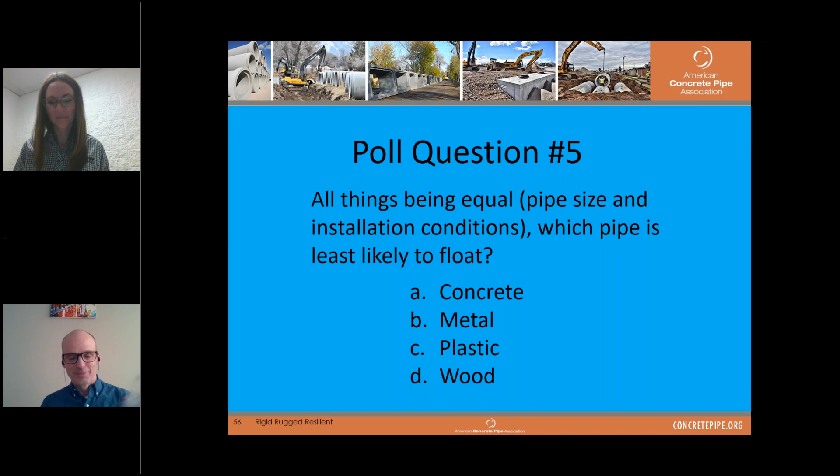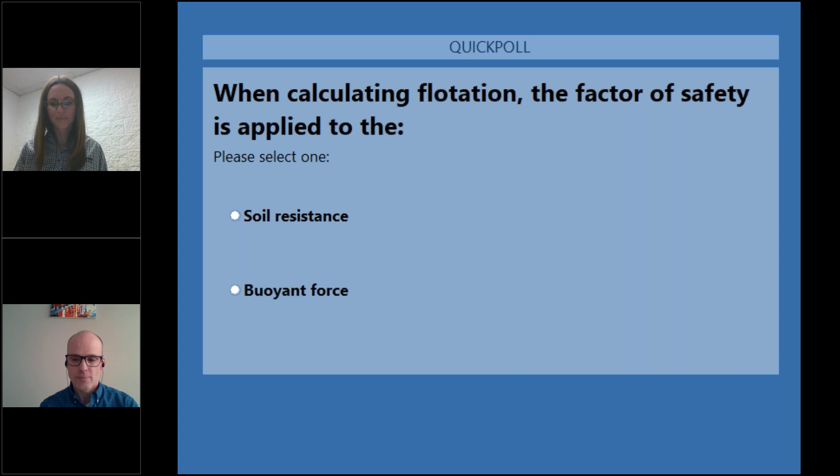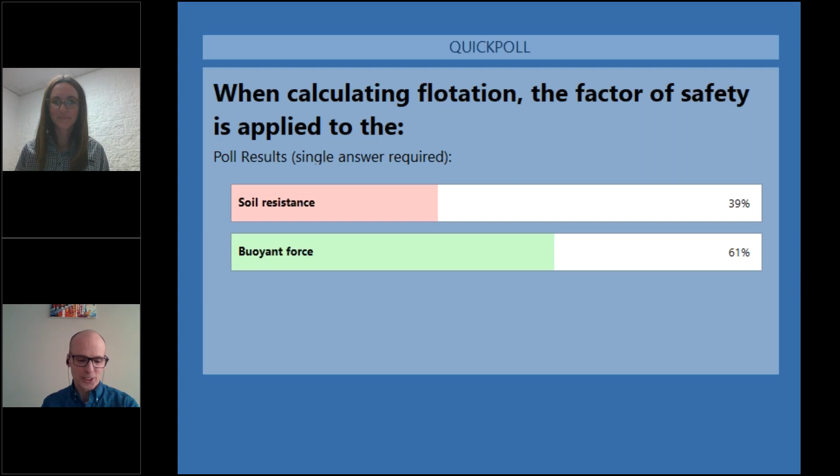And we'll talk a little bit about what Josh was talking about there and calculations. When calculating flotation, the factor of safety is applied to either the soil resistance or the buoyant force. Okay, let's close that, show the audience the results. So we had 61% said buoyant force and 39% said soil resistance. And congratulations, you're all right. I don't know how you want to apply it. This is the way you do it.

I'm going to turn it back over to Jennifer this instant. All right, Ken, do I have the control? Okay. Coming your way. All right.

So I would encourage you to reach out to the Federal Highway Administration HDS-5 document. This is available free online, and it's something that I've often reached to during my career doing stormwater and hydraulic analysis on pipes and culverts, a lot of good information. And I'm going to just read for you quick their definition of flotation. So it's a term used to describe the failure of a culvert due to tremendous uplift forces caused by buoyancy. The buoyancy force is produced when the pressure outside the culvert is greater than the pressure in the barrel. This occurs in a culvert in inlet control with a submerged upstream end.

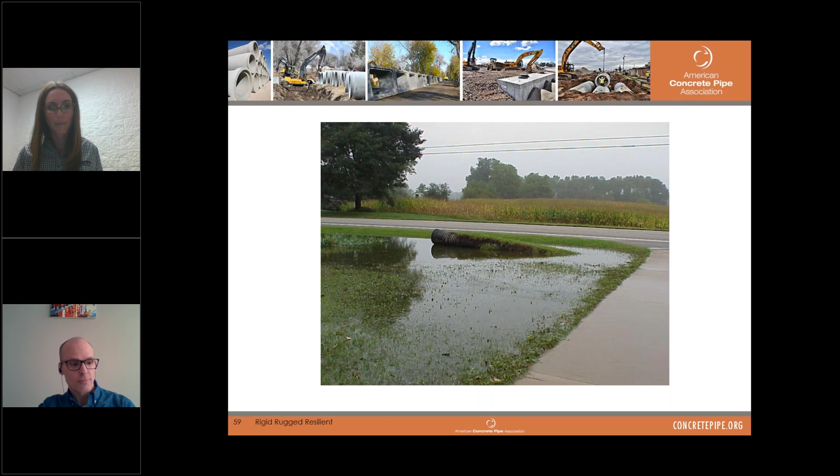So we can have that condition occur as well when we get blockages to culvert pipes. So you'll see this is a picture that I took in our Iowa market actually of a nice big branch that's caught in there. But in urban areas, I've seen culverts blocked by picnic tables and children's toys, and sometimes it even damages the end of that pipe where it gets curled and closed and just isn't operating properly.

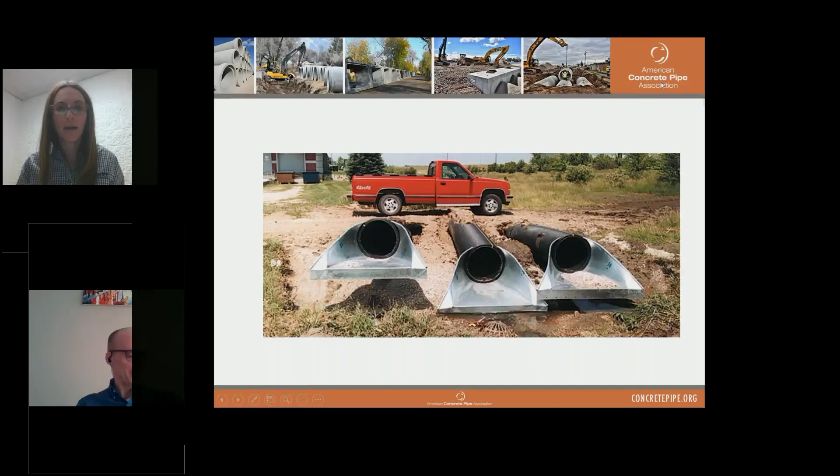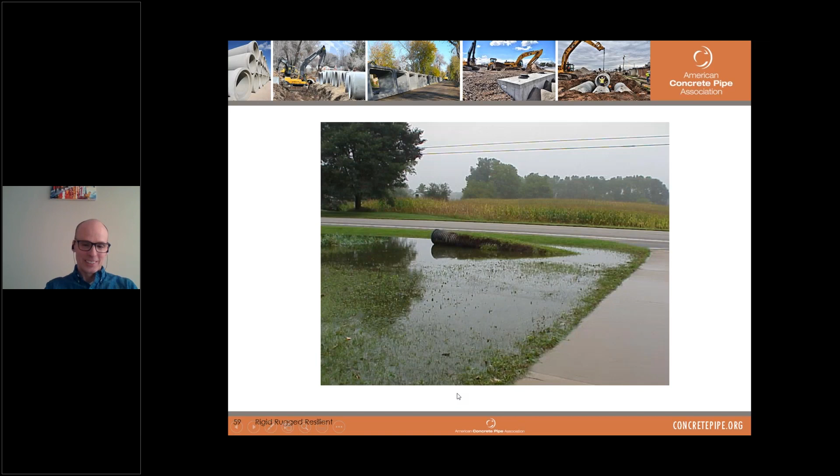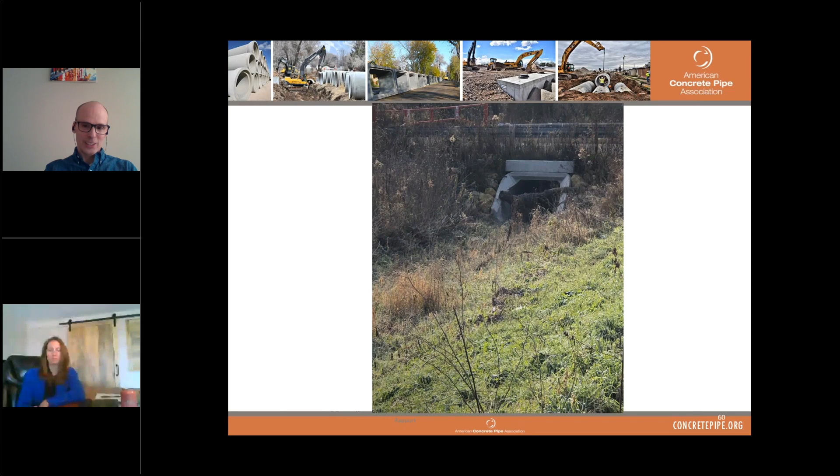Oops. Kim, I have a technical difficulty here, so can you help me out? Sure, it looks like we can still see your screen. Oh, you can? What do you see? But it looks frozen. Still the pipe with the log across it. Okay, can we pass it to Josh and let him advance the rest of the slides? That went to someone that's not even a presenter. Sorry about that, Jason. Hold on just a second. Getting it to Josh here. I got slided to Jason. Jeez, I thought you were starting a new movie with Jennifer, Frozen 3. I know, right? That's okay. All right. So, am I where you want me to be, Jennifer? I think if you could go to slide 60, which shows the blockage of the culvert. Okay. Can you see my screen? I can see it. Okay, so I got the blockage.

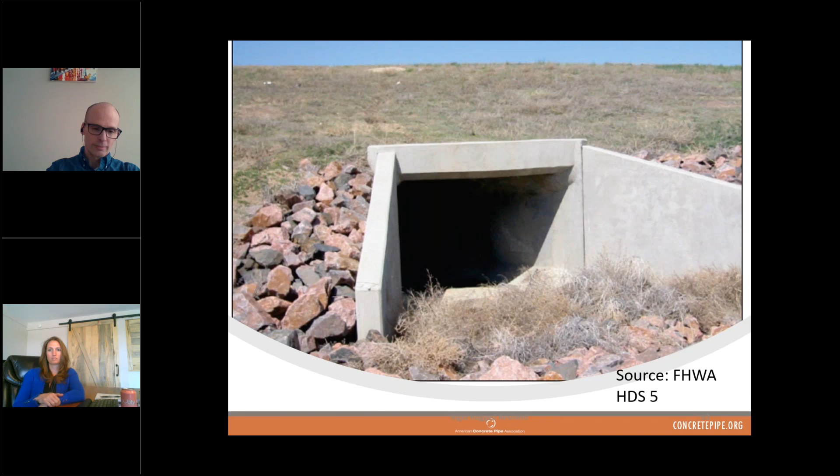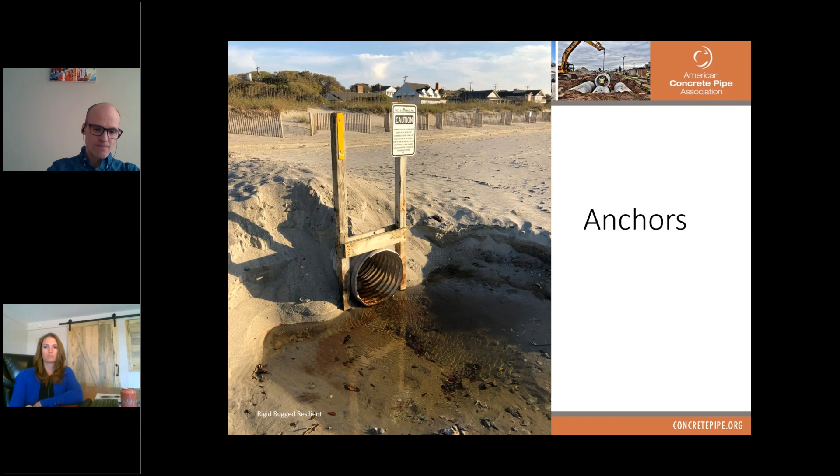So we can also turn to anchors. This is a photo that I took in Myrtle Beach. There's a lot of these pipe discharges right along the beach, and they all have this kind of anchoring system. And I suspect there's some concrete or some kind of dead weight underneath these, but we can also use concrete or sheet piling cutoff walls, some good heavy head walls. All of those provide anchorage. We do need to make sure that that culvert barrel end is securely attached to the anchorage devices in order for it to be effective. And this helps protect against that inlet bending and warping. Next slide, please.

Okay, so this is a video. Josh, I'll turn on the video on my end so that everybody can see it. Sounds like you guys will have to mute Jennifer, and then you can tell us about it following it. Okay. You let me know when it's running. This is a video that Brian Remsen, our Iowa City plant, was kind enough to share with me, and it's just an awesome video. I really like it. Are we playing? Working on loading. Okay. It's not very long.

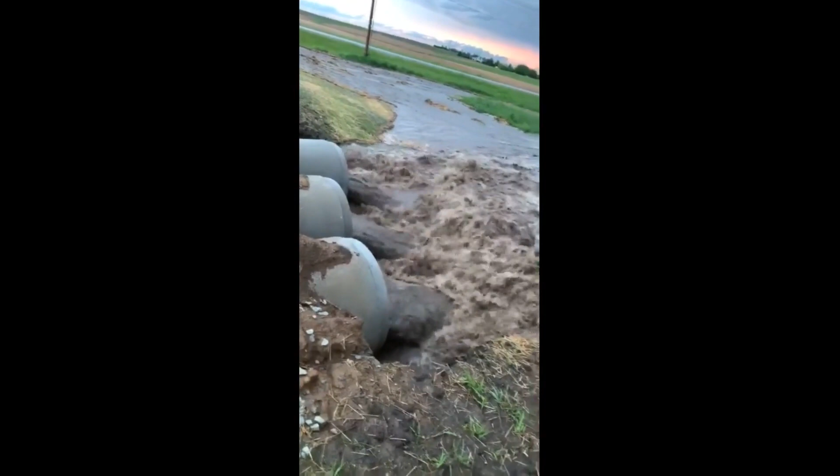So what you're going to see is there's a gravel road acting like an impoundment, and it's backing up a considerable amount of water. And Brian did a great job of giving us kind of a photograph of what's going on here. You'll notice that there's not a lot of cover over the pipe. Again, this is a riprap or gravel entrance, and there are significant forces of water coming through these pipes. And you can see at the ends, it looks like we probably need to put some riprap or end walls on these, but they are just passing the water just fine.

And holding in place. We don't see any washout here.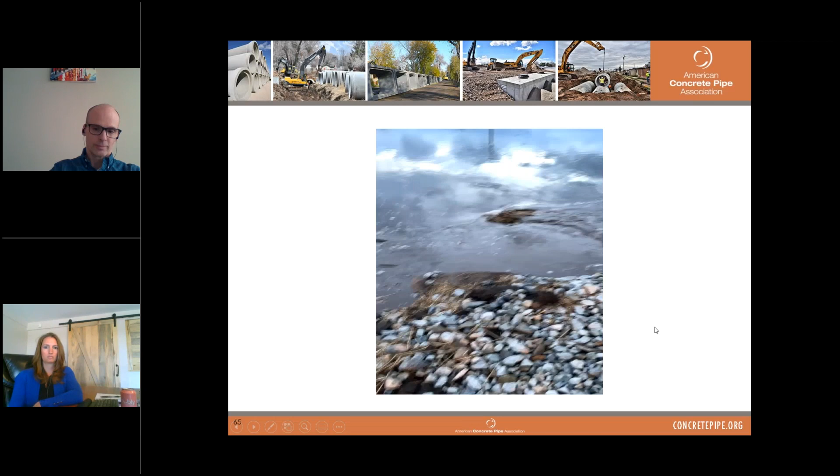Okay. Looks like it brings us to another poll question. All right, in good form with the rest of our presentation, I slid one extra one in here that I'm going to launch before we get to that last one showing on your screen. Oh, no. The question is, do you think it's important to have proper flotation design in your specifications? Yes, no, or it's not necessary, my area doesn't experience high water.

And while they're answering that, I want to bring up a couple more things about our presentation. We've shown some examples and discussed the water table up to the surface level. We do have an example in this presentation further back about when the water table is somewhere in between the top of the pipe and surface. We even touched a little bit on flowable fill with some ideas on how high up you can go with the flowable fill before the pipe starts to float as well in the back of this. So try to give you a little more extra for the money.

Hey, Kim, I'm getting a message that the audio is... Yeah, you are cutting out a little bit, Jennifer. Okay. Must be your technical difficulties. Okay. I can hear you saying okay, but

So the response to that was 92% said yes, 5% said no, it's not important, and 3% said not necessary because they don't experience high water. I might have answered that with the no, not necessary in Colorado. We typically don't have a whole lot of water and flooding until 2013 when we actually had a ton of flooding up in the mountains. So I think even in areas that don't have typical flooding, it's still important to consider what may happen in a larger storm, 100-year or 500-year storm. But I'm glad to see most of you said yes. And then we do have one last polling question for you guys.

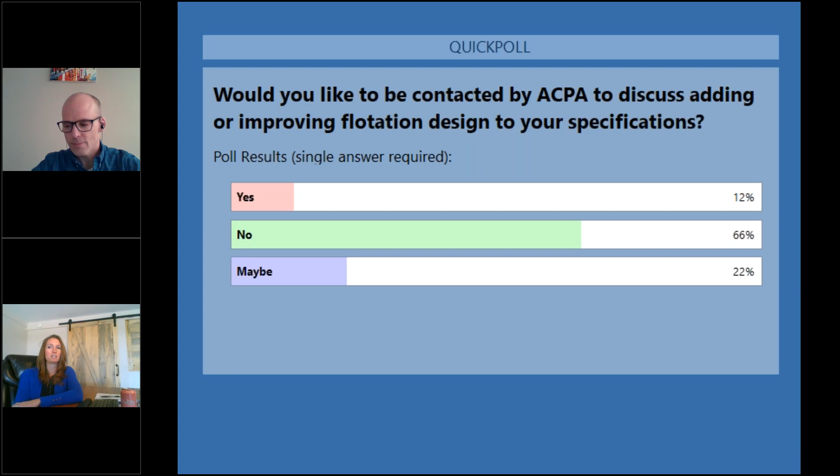Josh, I'm going to turn it back to you because some of the questions go back to your calculations, so you may want to refer back to some of your slides. Sure. I'm going to just pass it back your way.

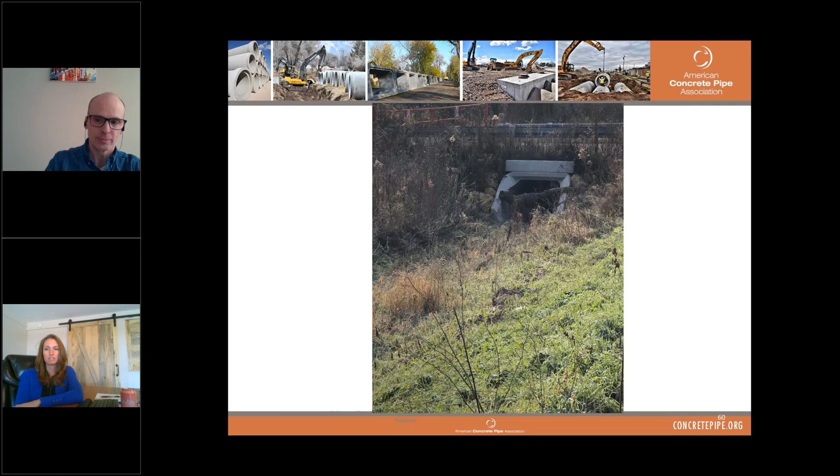Some of these you may have already answered, but you could do a second review because they came in as you were talking. So one of them was, what if we are only using gravity loads and not accounting for soil friction? Is 1.0 sufficient? Yeah, I don't think so. And I've talked to some people about that. You know, weight is weight, but it's kind of like if you think of AASHTO and load factors. Load factor for water is 1.0 because everybody knows what water weighs.

When you get to soil load and someone tells you to shoot 120, what are the odds it might be 115, 110? Like I said, we used a conservative value of 120, which is kind of a low end. But typically people always think 120 for everything because it's generally what we've gotten used to. We've had a lot of soils less than that; even when they're saturated, they're not quite that high. So I still think you need a factor of safety in there, because there is some variability within that soil.

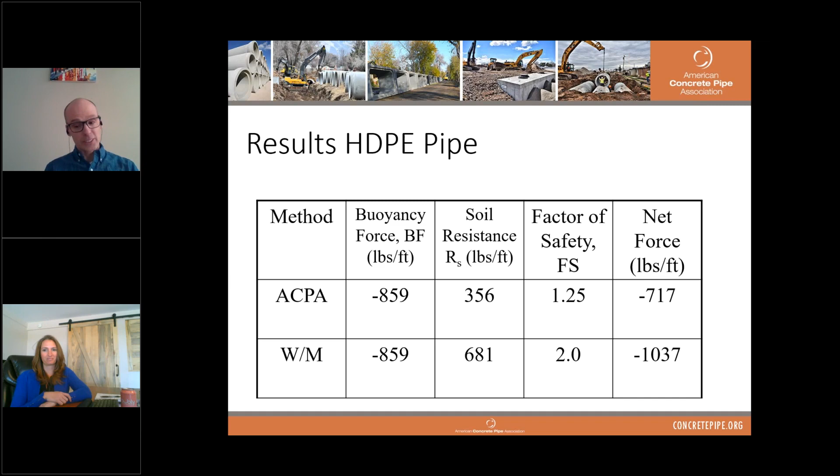Okay, perfect. And I think this is a good slide for this next question. It says, what happens if the ACPA method gives a negative number and the Watkins-Moser method gives a positive? Wow, so if we gave a negative number, it was going to float, and Watkins said it wasn't. Be careful, I have a lot of respect for Dr. Watkins and Dr. Moser both. Watkins I never met, Moser I know a little bit. A lot of respect for them, but once again, the factor of safety is not there.

I tend to just rely on our method. If our method says it's going to float, I'm going to trust it. If it says it won't, I'm going to trust it. We visualize these things, and it's hard to really tell from the picture because the soil may have come back in, but you don't see that soil wedge whenever you go out and see some of these pipes float. Once again, doesn't mean the soil hasn't filled in, but I'm not that trusting. I'm an engineer, right? Conservative. If anything tells me I might have a problem, I'm going to err on the conservative side.

Okay, and I think this question follows up with that discussion: is the factor of safety different for Watkins-Moser? Oh, no, it's funny. Let's be honest, first of all, it's our factor of safety we put in those methods. I'm not even sure what Watkins and Moser would express for the factor of safety. We call it the Watkins-Moser method because Watkins developed it, but Watkins got his tutoring under Spangler. And then Moser got his tutoring under Watkins.

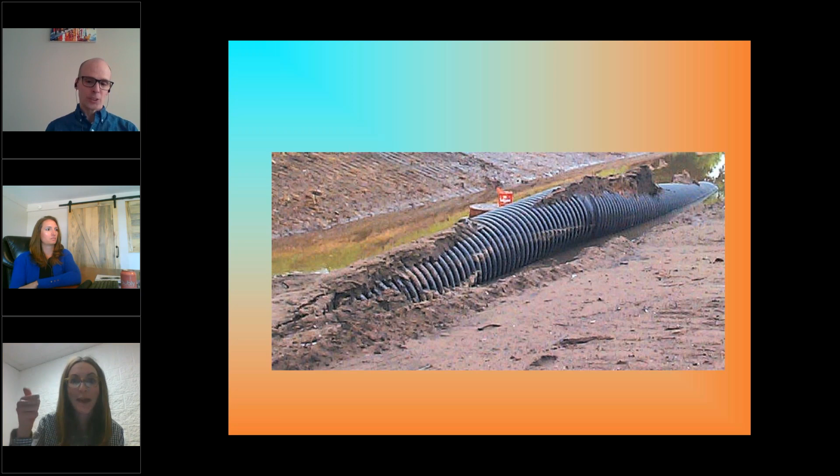And then, if you're looking further, Dr. Folkman got his tutoring under Moser. And they keep coming out with a textbook, one after the other, keeping us up to date with the latest on pipe design. These are the gentlemen developing the textbook that we look at to come up with this method. It's really the same method, just continued through the different textbooks.

Okay, here's a good one to go with your polling questions, Josh, the trick questions. This one says, but the soil is also typically lighter due to water pushing it up. You might want to expand on that a bit.

Okay, and it looks like Jennifer's back on.

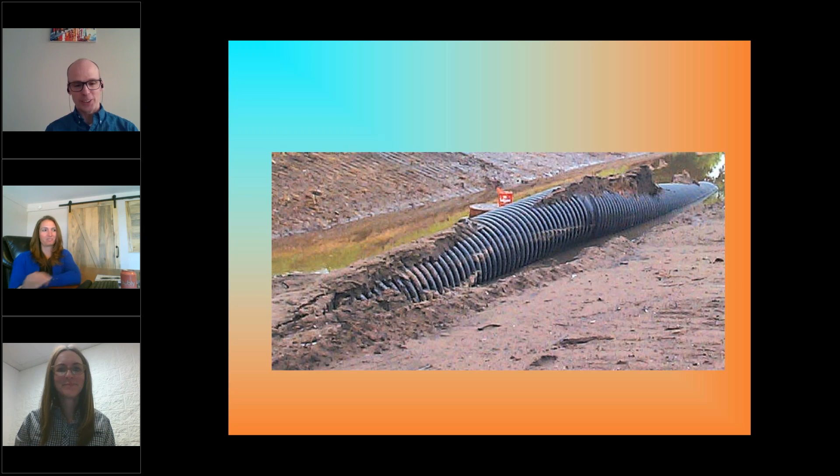I don't know if she can talk to us or not, but that's why we use the buoyancy force, right? If you look at that very first term, that 120 minus 62.4, that is accounting for the flotation force or buoyancy force upon the soil. So we account for that in our calculations.

As I say, there's an example in the back that kind of shows there is soil that doesn't have any fluid in it, and you're going to account for the full force from that soil, full unit weight. But if it's got the fluid, then we adjusted for that in the buoyancy unit weight.

I can see your head shaking, Jennifer, so that's good. All right. I agree with you. All right. And I agree. If you agree with me, I must be doing okay.

Right. So the research that I did leading up to that, it does seem like that's a point of confusion for a lot of folks, but that's a common way of accounting for that.

Okay. Here's another question for you guys. Why are you using the thickness of the corrugation rather than the thickness of the metal pipe? I think what they're probably alluding to is, I used a 48-inch pipe, and then I used a 49-inch diameter for that. This isn't rocket science. This is engineering. Engineering is the practical application of science. So I did the method I found most practical.

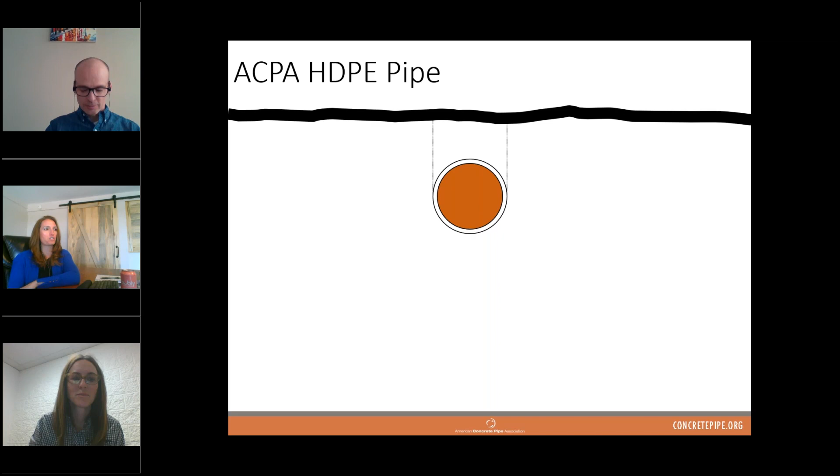Okay. Someone asked, and you might just have to go back to clarify their question, what was the outside diameter you used in your equation for the concrete pipe? Yeah. I think you did 54, right? Yes. No, 58. Right? It was 48-inch pipe with a 5-inch wall.

Okay. Yeah, I showed, I think, in the diagram, not in inches, but I showed you 4 point whatever. I can't even see my screen right now. Yeah, it's 58 inches, because it's a 48-inch pipe with a B wall, 5-inch wall, which is another item you can look up, either in an ASTM standard, or in a design manual. But a 48-inch pipe, most suppliers are going to supply with a 5-inch wall thickness to make it 58 inches outside diameter.

That's what we use. And that was a little easier for us because it's not corrugated, so you can't blame me for splitting hairs here. I just used 58 inches on that one. Right. I was just going to add, most manufacturers have tables showing what their wall thicknesses are, so you can reach out to whoever's your supplier.

Okay, another great question, or more of a comment here. Maybe you guys can agree or disagree with this comment. When looking at scour of the backfill or the embankment, and assuming a complete loss of backfill, be it any pipe material, precast is extremely less likely to be displaced downstream. You guys agree? I agree.

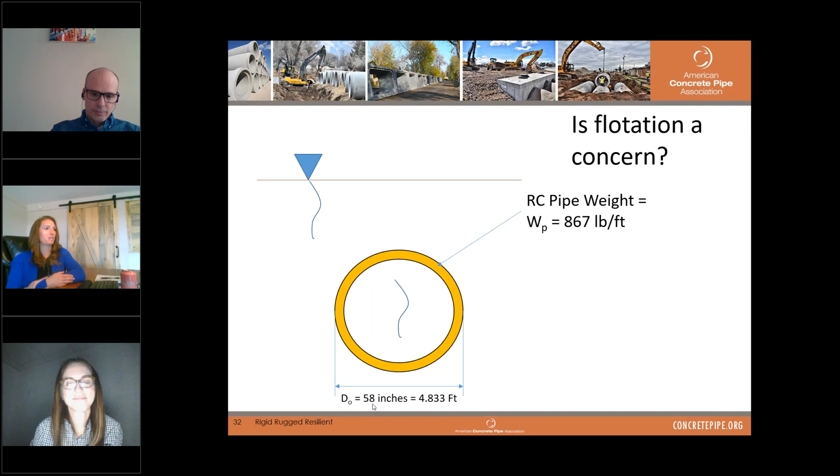Okay, we've got a lot of great questions here, so we're going to keep going, and hopefully everybody's learning something as we are. You mentioned using flowable fill to help with weight, but I have witnessed pipe floating in flowable fill. Are you using flowable fill above the soil of the pipe and not directly on the pipe? I'm not sure I understand that last part, but.

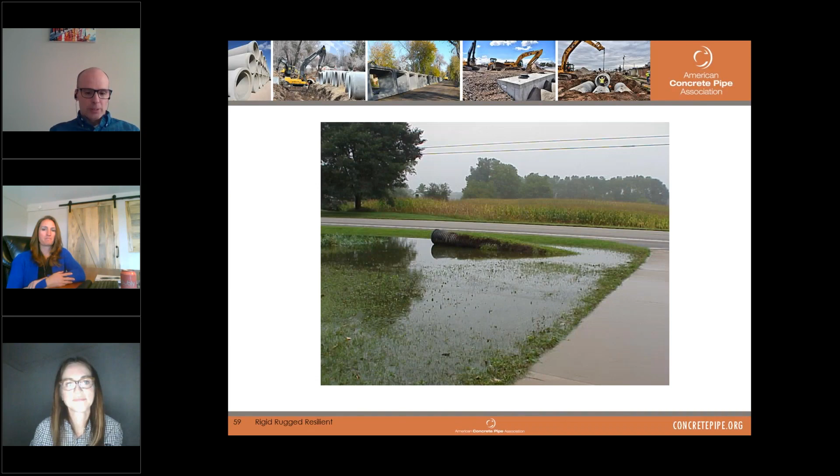I don't think it mattered much with diameter in this particular one, if I'm not mistaken, but basically, even with a concrete pipe, you get up to about 40% of the outside diameter, and you have a potential for it floating as well. So the HDPE and CMP, you have to anchor them down in flowable fill.

It's another application of Archimedes' principle of flotation. In this case, the weight is much heavier. We're assuming around 130 instead of 62.4. So it's just a much stronger buoyancy force if you put flowable fill in. Okay, great. Thanks, Josh.